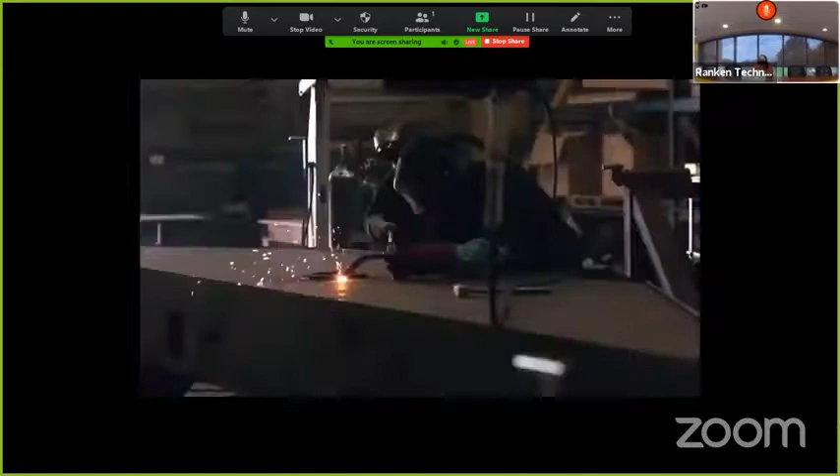We made that. We've made parts for satellites that are orbiting the Earth. I like to think that if I look up at the sky at just the right time on a clear night, I just might see it flash by. For millions of Americans, manufacturing is a great career, filled with opportunity, and it's closer than you think. Right now, probably just a few miles away, are good, solid jobs leading to lifelong career opportunities in manufacturing. Find out for yourself by attending a Manufacturing Day event in your community this October. You can visit facilities and meet real people just like you, who have made a good life for themselves. What is the future of manufacturing? You are.

Let's begin. Today we are going to break down the manufacturing industry into two areas: machining and plant operations. Let's start with machining. Machining means to use a machine to perform a task. Materials that are machined are usually metals, but other materials including plastics and graphite can also be machined.

Manufacturing means to produce something. Paper is a manufactured item. Plastic bags are a manufactured item. So are tissues, clothing, and many foods. The machining industry produces end products and components that are assembled as end products and supports manufacturing for the products used by people throughout the world every day.

Ranken has connections with several area companies that machine important parts for various industries. Let's begin by watching a few videos that they have sent in showing us several aspects of the machining industry.

We will start with a company called Hydromat. Hydromat is a St. Louis company that builds precision transfer machines. They literally make the machines that other machining companies use to make precision parts. They innovate and engineer metalworking solutions by building the appropriate machines for the job. They rely on skilled workers to design, manufacture, and set up their precision transfer machines.

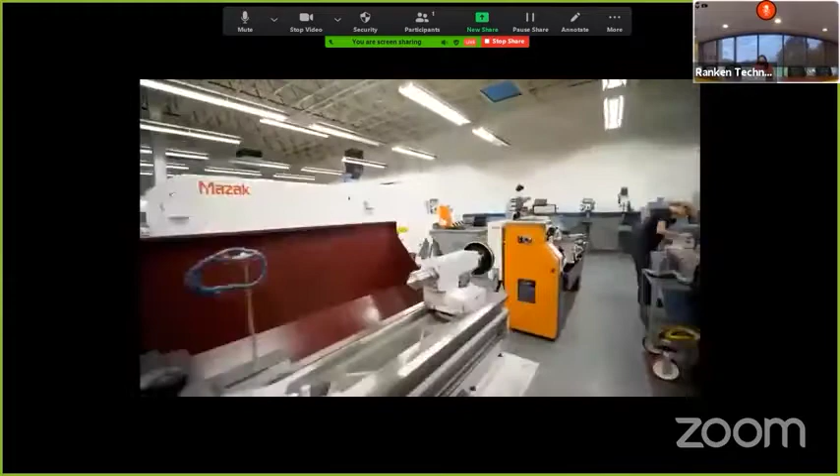Next, let us look at another company that machines parts in Wright City, Missouri. Tech Manufacturing is an aerospace machining and manufacturing company specializing in computer numerical control, known as CNC. That's precision machining of complex, thin-walled, monolithic, hard metal, and aluminum structural aerospace parts for commercial, military, and business aircrafts. CNC precision machining describes cutting, milling, turning, and electrical discharge machining using CNC equipment.

Tech Manufacturing has been a longtime supporter of Ranken by employing many of our interns from our Advanced Precision Machining program. In this video, you'll be introduced to lean manufacturing, a method companies use to constantly look for ways to reduce waste and maximize time and resources. Be ready to identify how Tech Manufacturing implements lean manufacturing, and notice their emphasis on quality. Identify the 3-letter machine used to precisely measure parts to ensure quality, as you'll need this for the scavenger hunt. Okay, let's take a look.

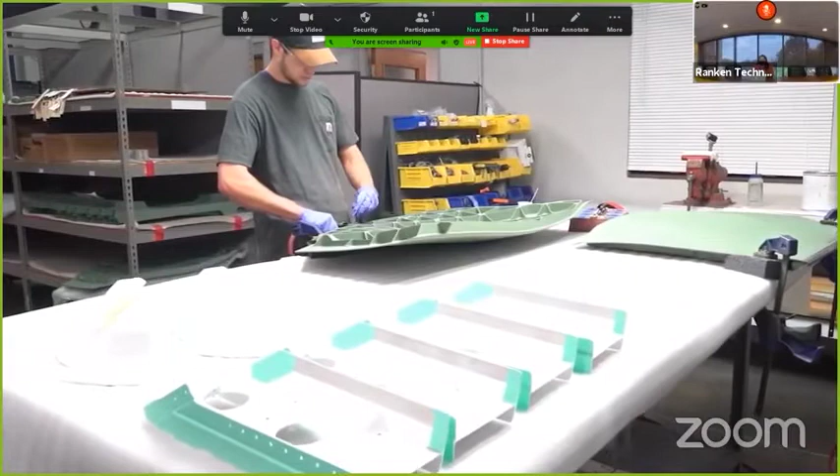Since 1956, Tech Manufacturing has been providing world-class machining and assembly to customers in the aerospace and defense markets. Tech Manufacturing specializes in precision machining of complex aerospace structures. These complete components are constructed of thin-walled, monolithic, hard metal, and aluminum, designed specifically for aerospace parts in capacities of commercial, military, and business airframes.

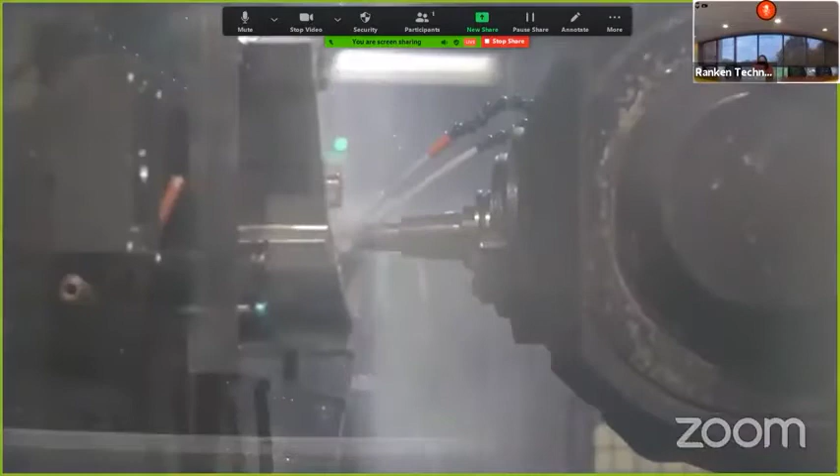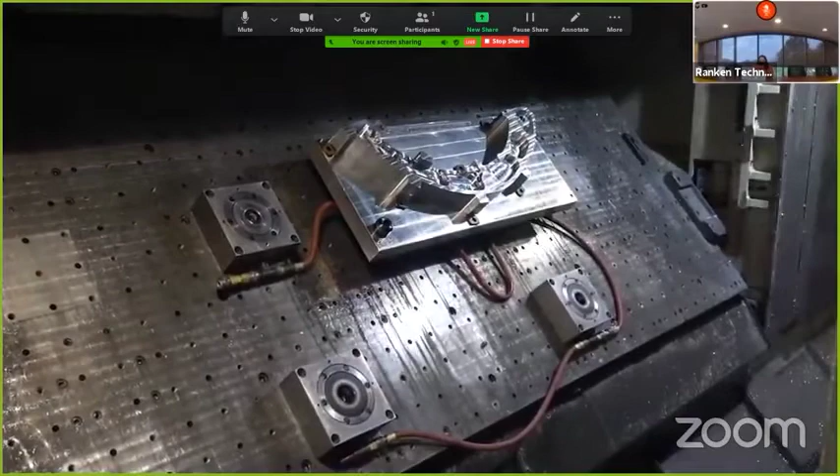Our team provides elegant manufacturing solutions with the highest level of machining skills. Precision, quality parts, and superb customer service are the foundation of why Tech Manufacturing has been a trusted supplier to large aerospace manufacturers for over 60 years.

In 2018, Tech Manufacturing joined the Domaille family of companies. The resulting combination delivers a broader solution to customers. Domaille family of companies is a worldwide provider of innovative solutions within the aerospace and defense high-tech industries, and a leading OEM of fiber optic polishing equipment.

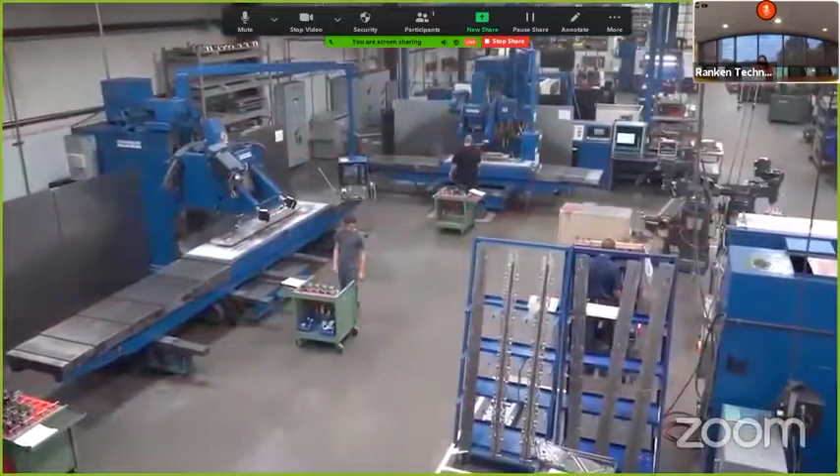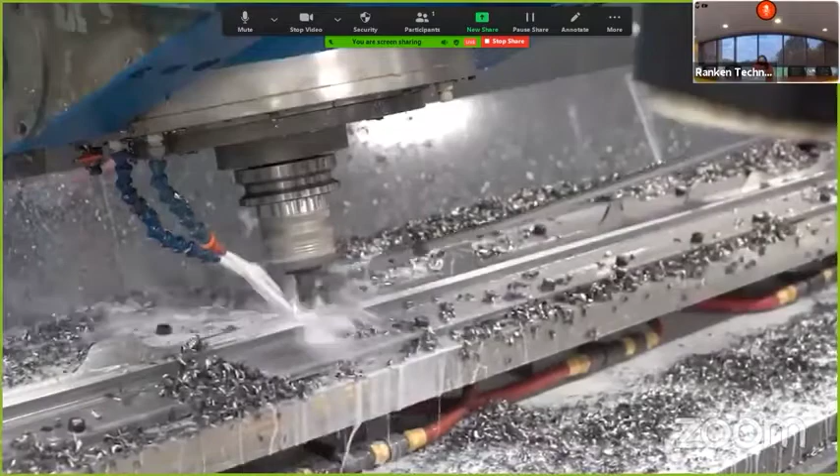Considered an expert in multi-axis machining, Tech Manufacturing offers 3, 4, and 5-axis machining of soft and hard metals. Our part size extends up to 166 inches. Typical materials manufactured from extrusion, casting, forging, and plate include aluminum, titanium, beryllium copper, stainless steel, AerMet 100, and Inconel.

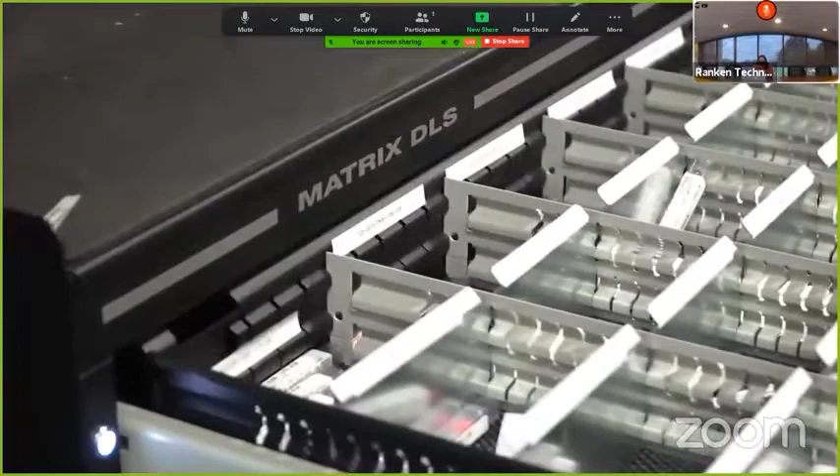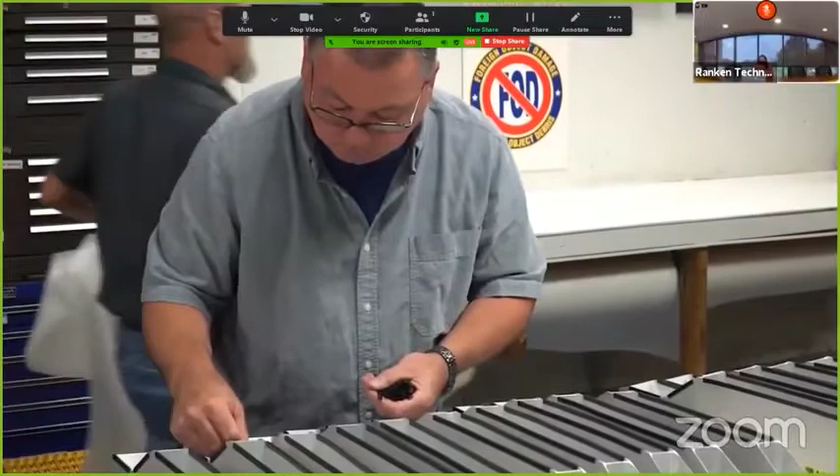We have fully implemented lean manufacturing processes to deliver the highest quality precision machined aerospace parts. Our lean manufacturing process starts with organizing parts into part families. The part families are assigned to machine cells designed to specifically handle each part family. Regular monitoring of specific metrics for each cell allows a clear focus on continuous improvement, as well as positively impacting predictability, throughput, and on-time deliveries.

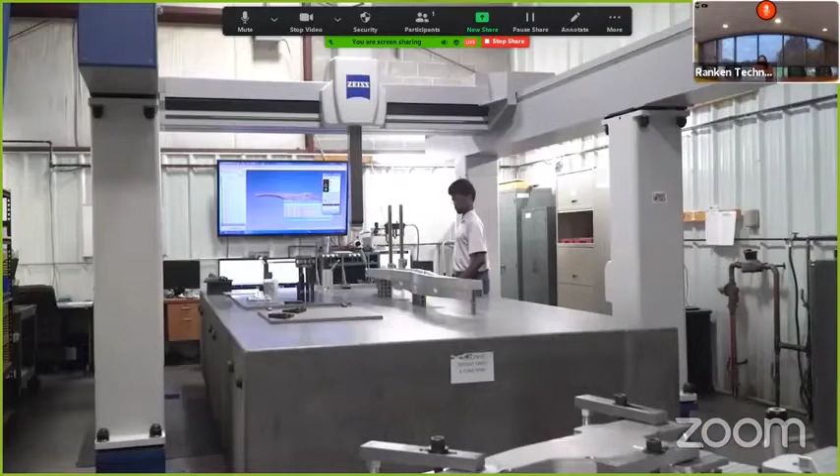Our team and equipment play an extremely important role in maintaining our proven record of quality and delivery performance. Tech Manufacturing utilizes a scanning tip probe Zeiss coordinate measuring machine, or CMM, operating on the latest Calypso computer-aided inspection software to support our quality control processes.

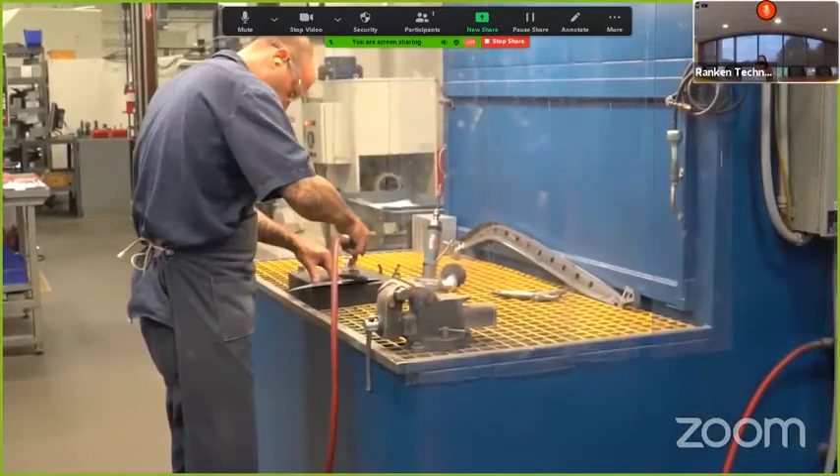Our impeccably skilled work has been recognized through several awards and certifications, which include certifications in both AS 9100 and ISO 9001, fracture critical and traceable part compliant, ITAR registered, and Digital Product Definition, or DPD, certified.

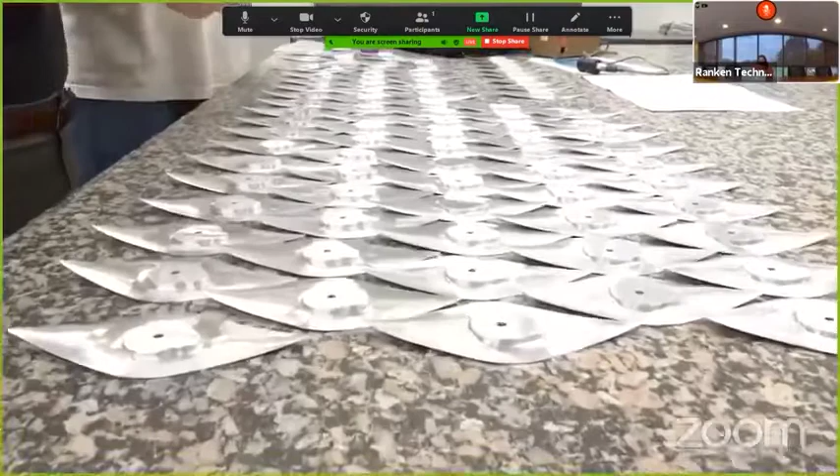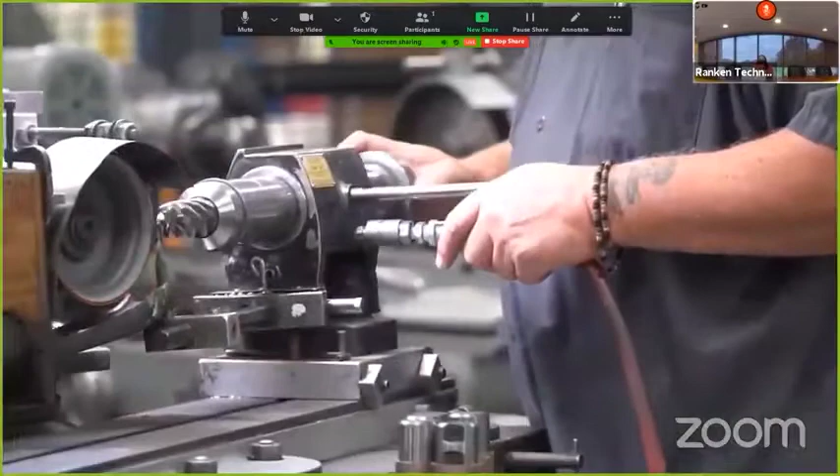Tech Manufacturing has full DPD capabilities approved by customers including Boeing, Lockheed Martin, Northrop Grumman, Gulfstream, and several Tier 1 contractors. Our engineering team is fluent with complex models and has several software packages that allow digital data to be securely received, translated, and validated through a robust AS 9102 First Article Inspection, or FAI, process.

Tech Manufacturing has a robust and thorough quality planning process that begins as soon as the customer's purchase order is received. Our sophisticated quality plan is developed using Discus FAI software and begins before any other engineering activities, which ensures requirements are met and understood throughout the entire planning process.

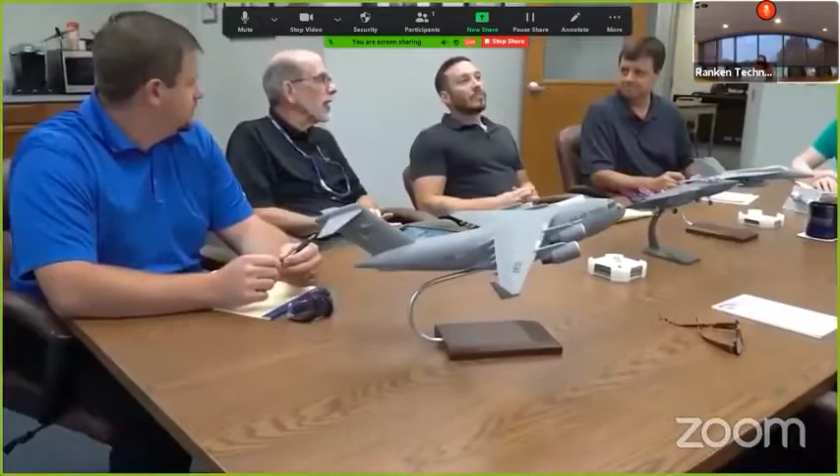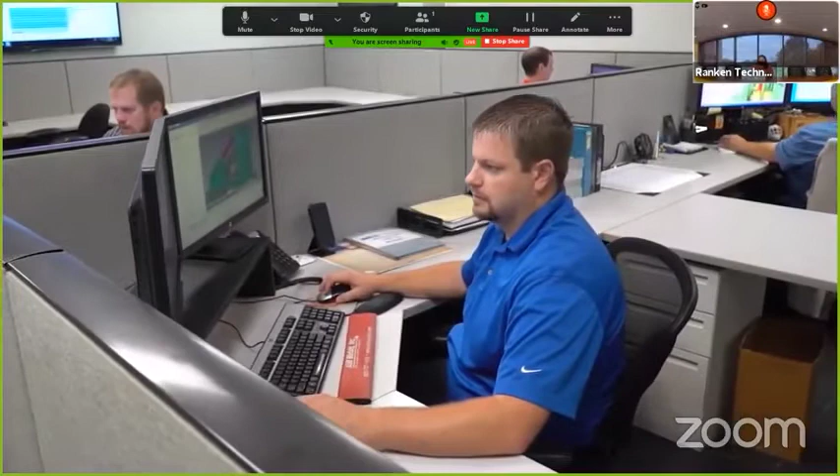Quality plans, including AS 9102 forms, go through a rigorous review process, ensuring all requirements are captured and flow correctly into production documents. Tech Manufacturing utilizes the most current CAD/CAM software to support manufacturing processes from prototyping to full production runs. We also support a variety of other drawing formats and specifications.

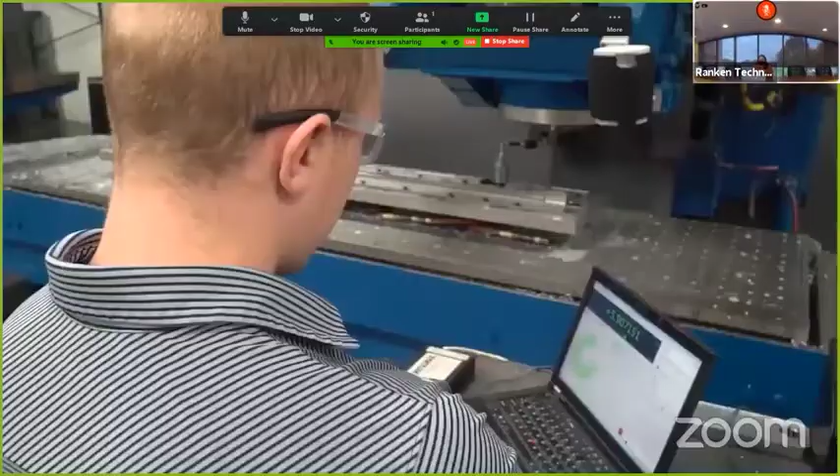Our ERP and supply chain management systems synchronize the manufacturing, addressing everything from encrypting and vaulting data to flowing contractual obligations. Throughout our supply chain, Tech focuses on adding value through building a strong team and by working in conjunction with local technical colleges. Our talented group recently earned the Top Shops Award from Modern Machine Shop.

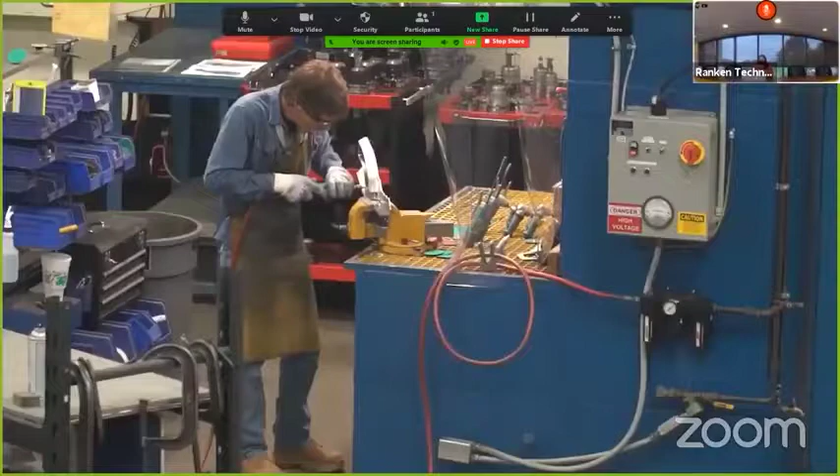Whether your organization needs help with manufacturing input, prototype machining, or a highly competent supplier for built-to-print applications, we encourage you to make Tech Manufacturing your key contract manufacturing partner. Please visit our website at techmanufacturing.com.

Wouldn't it be cool to say you made those precise parts that go on Air Force jets? That's something to be proud of. Notice they rely on skilled workers throughout their shop.

Tech Manufacturing noted how they use really cool software to make their job easier. Some of you have maybe played or watched kids play the game Minecraft. That is similar to the 3D modeling programs used in the manufacturing industry. In the Tech Manufacturing video, they used various CAD/CAM software to recreate 3D models of the parts.

Tool paths are generated from the 3D models to produce a language used by machines. The tool path is back plotted or simulated before using an expensive CNC machine and raw material to test the program. This is another way lean manufacturing is implemented in that industry.

In the next video, you'll be introduced to multi-axis machining and its many functionalities. Multitasking machines deliver maximum versatility and throughput. The machines combine the capabilities of a high-powered turning center and a full-function machining center to produce parts in single setups. Recall Tech Manufacturing and Hydromat utilizing multi-axis machines to be competitive in their industry. Multitasking is the technology of the future.

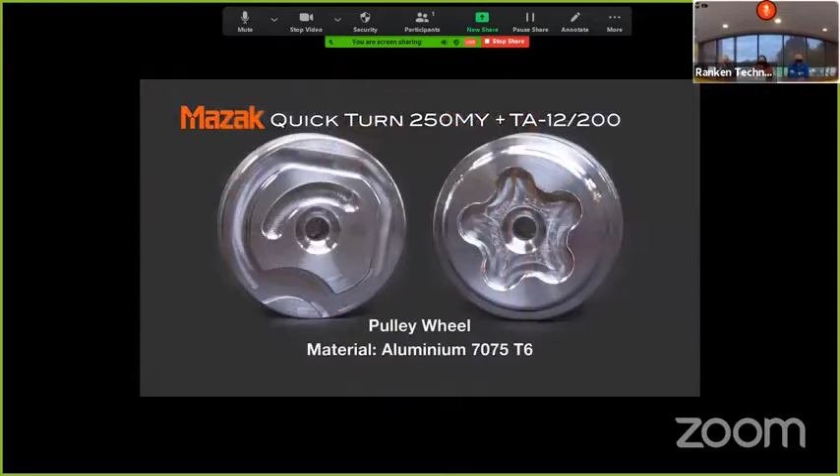Let's talk about how Ranken can help you become a machinist. The need for qualified machinists is rapidly increasing. According to the U.S. Bureau of Labor Statistics, this field is projected to grow by 10% from 2014 to 2024, faster than the national average.

Ranken's Advanced Precision Machining program was designed to meet those needs by supplying employers with skilled employees to offset the skills gap. According to research, the best way to learn your trade is to do it.

The hands-on experience received by our students is unparalleled. Projects are designed to simulate real-life situations, offering problem-solving opportunities not easily matched in the classroom setting. Our curriculum was developed in cooperation with industry partners to ensure courses and student-level outcomes are aligned with industry needs. It is proven that student growth and confidence are maximized when given opportunities to access and work in the

state-of-the-art CNC and conventional learning environment on a wide range of group and individual projects.

The courses offered are as follows: Machining Foundations, Applied Machining Foundations, G-Code Programming, Advanced Precision Machining, Mazatrol Programming, Mastercam Programming, and Multi-Axis Programming. Additionally, all students are required to participate in an 8-week-long internship.

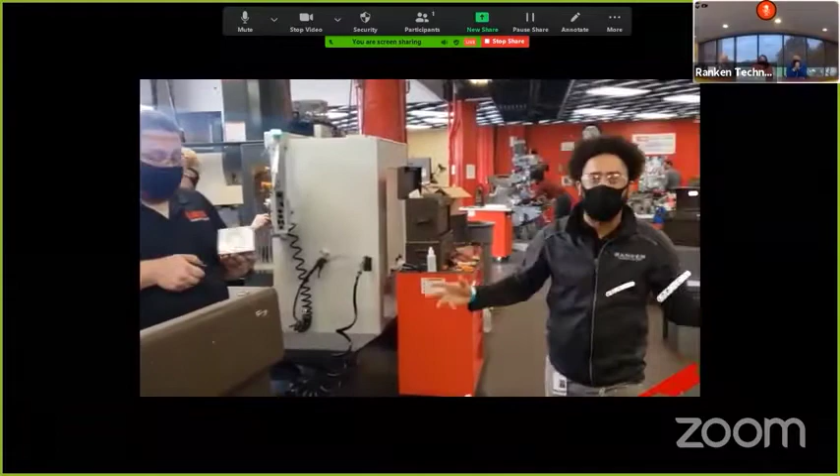Let's check out Patrick. He's one of my students that wrote a program all by hand. Most of them do here. He's about to run that right now and show you guys how to make some chips and how to make something out of nothing. All right, check this out. Patrick, you ready?

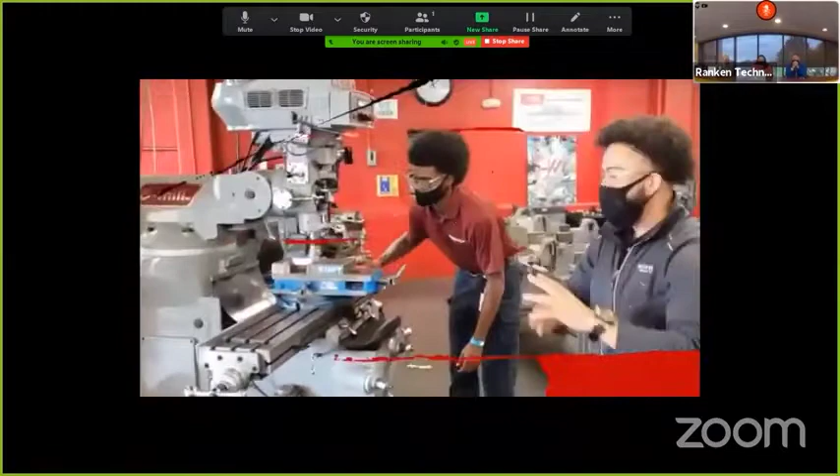Programming and tool tapping—sometimes you have to do stuff by hand. Come check out Marquez's project that he's doing. This is manual machining. He's doing it all by hand.

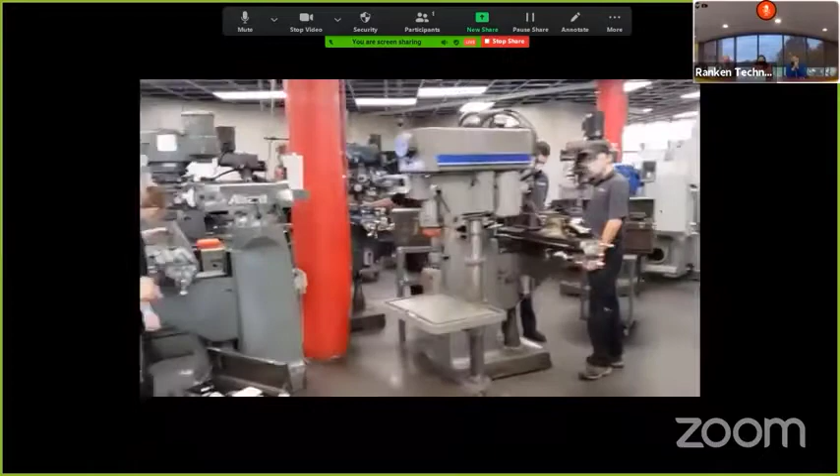You get to see some of our intro students. They're also working on Bridgeport mills today. They're setting them up, they're dialing them in.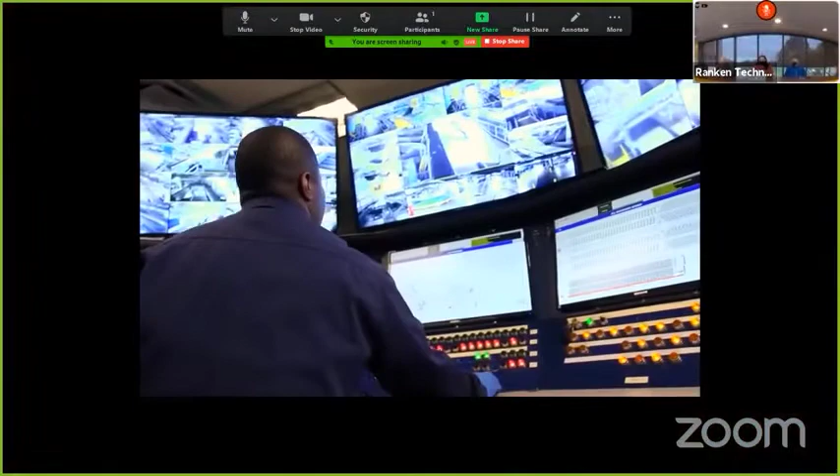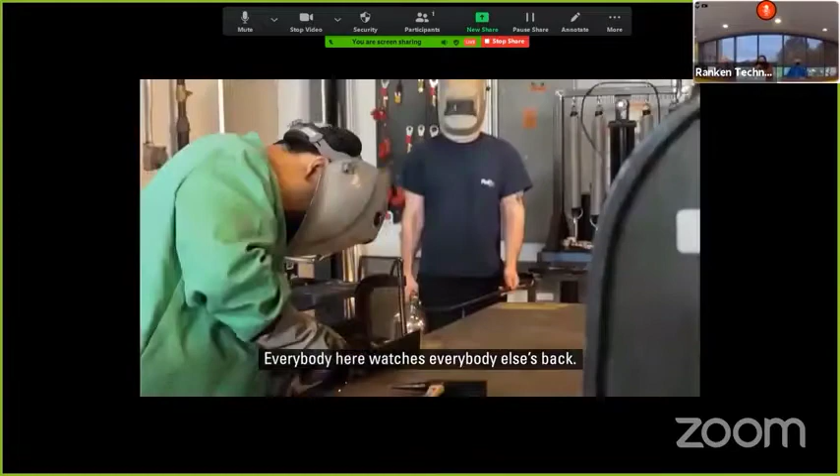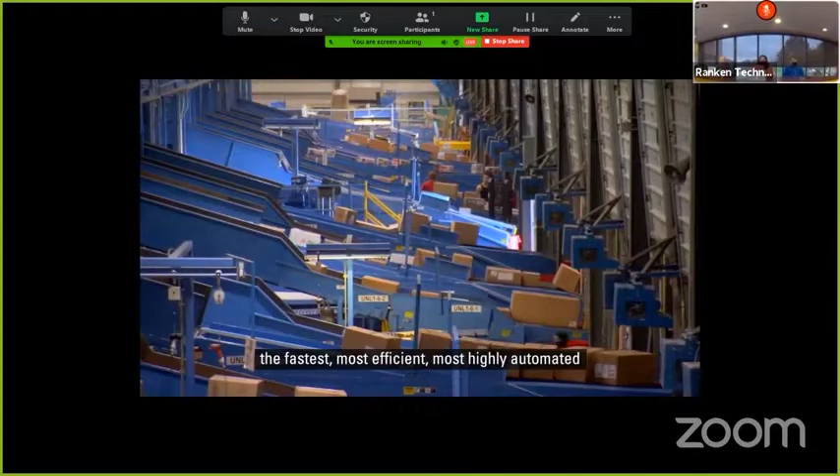When I came here, I saw the maintenance team and I was like, wow, that's a job I want. This is not a one-man operation. We hold ourselves accountable. Safety is everything. If it's not safe, we're not going to do it. Everybody here watches everybody else's back. That's why we work so well together. FedEx Ground Maintenance Team. Every day, we bring our best. It's just that simple. We repair, maintain, and engineer the fastest small package sortation network automation. It puts us ahead of the competition. Maintenance, it keeps us there. If the conveyor is not working, we need to be on point, ready to go to fix it and have it up and running. Everybody tries new ideas. There's plenty of people here that know a little bit more and are willing to help you learn more and advance into your career. It's that huge experience level that we can draw from that really makes us who we are and as successful as we are. The right place, the right price, backed by the right team. The maintenance department here at FedEx is very important. It's vital to the day-to-day operations. If the building's not operational, nobody's going to get their package. Everything can be improved on, from the time the package comes out of the trailer until it's loaded to the next. If you have an idea, you can talk to your manager or boss or supervisor, whoever's available, and they'll support you. It's got its own framework. At the end of the day, we all get around and share our ideas, put our ideas together and come up with the best solution. The equation is simple: the value of time, the advantage of speed, the satisfaction of our customers. This is why we dominate the ground pickup and delivery experience. FedEx. It's what we stand behind. Together, we are FedEx Ground Maintenance Team. Together, we are FedEx Ground. Every day I bring my best. At FedEx Ground, every day we bring our best.

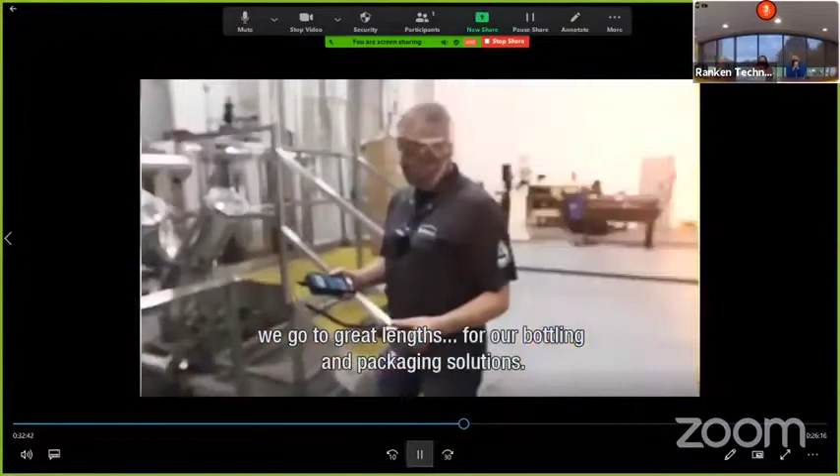We deliver innovative, tailor-made solutions that meet the individual needs of retailers and A-brand customers. Even though the drinks we produce do not carry our name, we go to great lengths for our bottling and packaging solutions.

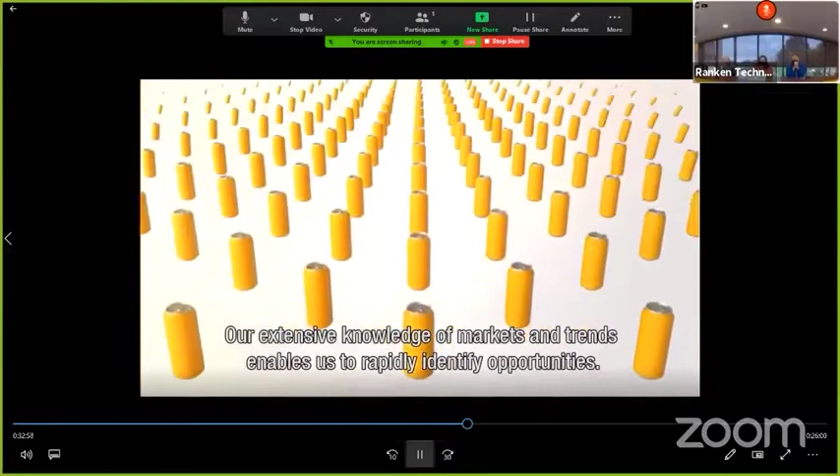We take responsibility for the quality we deliver, because our customers' success is our success. We continuously invest in production capabilities, equipment, and our staff. Our extensive knowledge of markets and trends enables us to rapidly identify opportunities. Being agile and reliable, we work closely with our customers, constantly developing and producing new concepts.

What we do has a direct impact on the environment through our sourcing and production process. In doing so, we touch the lives of our own people, as well as those in our supply chain and surrounding communities. A big responsibility, but also a big opportunity.

Co-founder of the Sustainable Juice Covenant, we set an ambitious goal for 2030: all fruit for juices sourced by Refresco should be grown sustainably. One clear example of how we innovate responsibly. Refresco, expert in beverage solutions.

Let's hear about another company called Nestle Purina. Not only is their corporate headquarters located here in St. Louis, but so is their support center manufacturing facility. This facility machines the parts for their other manufacturing facilities, ensuring quality and timely delivery of parts.

Today, they have a modern machine shop along with sheet metal and welding fabrication shop that supports all of their North American factories. They also provide prototype development and testing, innovative design services and support, inventory space for spare parts, electrical and automation, mixer inspections and rebuilds, and capital purchasing services. This truly houses the team of people that is part of their relentless pursuit and pledge to continue innovating.

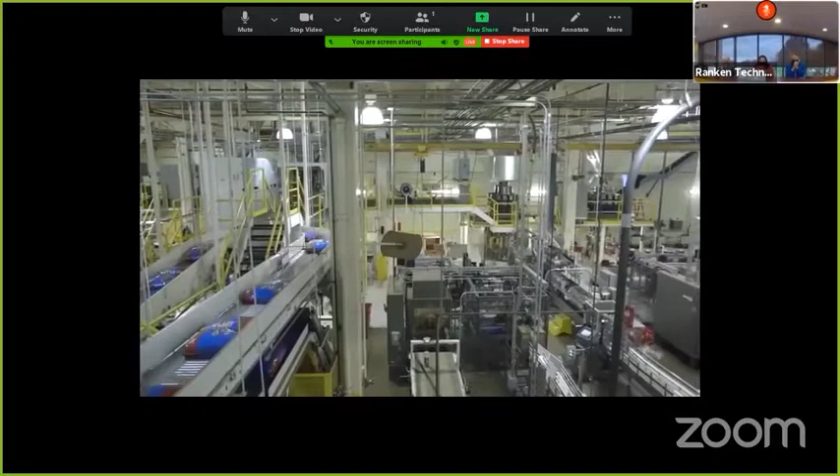You know us as Purina, and I wanted to take an opportunity to explain to you why we are so inspired on coming to work every day. If you look at everything we do, all the way from the floor perspective, even to what I do on a day-to-day basis, we are inspired to make sure that we have the highest quality products, not only to keep your pets happy, but also to keep ours as well.

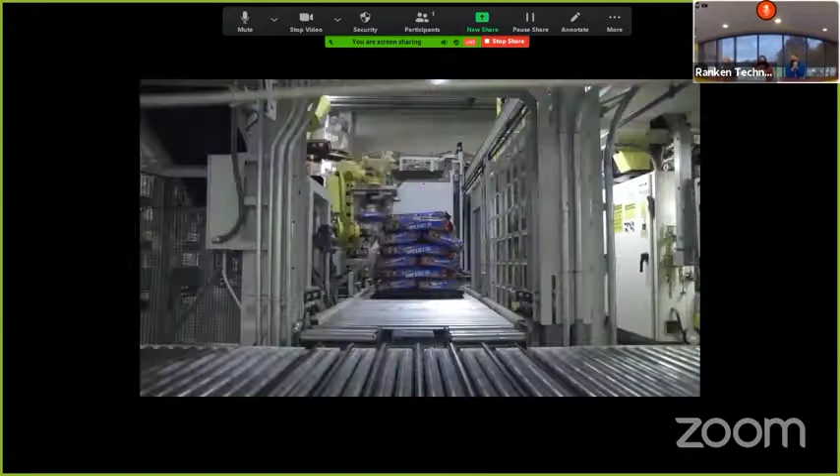Manufacturing over the past several years has really evolved. If you look at where it was about 10, 15, 20 years ago, it was very manual labor, a lot of interaction from an employee standpoint on the tasks they performed on the floor. As time has come along, technology has actually been integrated back into the process, and we have found ways to improve the performance of the equipment and the way that the employee performs their job.

So manufacturing has a lot of components to it. Everything from receiving raw ingredients in to the point where we store it and we mix it and we put it in extrusion. But that's not just manufacturing. It's everything all the way back to the marketing end, where we're actually looking at product development and making sure that we've got the right stuff out on the market, to even the consumer side, where we're making sure that we have a good relationship with our customers and our consumers.

The other part of it is, if you look at it, yeah, we manufacture here, but we have a global impact on what we're doing on a day-to-day basis. We actually at this facility ship to New Zealand, to Mexico, to Hawaii. So it's not just the United States, but Purina as a whole is shipping to all countries as well.

So would I've told you like 12 years ago career path was going to be manufacturing? Probably not. But you know what? I'm here and I absolutely love my job. I love what I get to come in and all the individuals that I get to work with on a day-to-day basis. What I want to do is I want to take an opportunity to challenge you: I dare you to consider a career in manufacturing.

Notice how being a part of a manufacturing company involves so much innovation. As they look to produce quality products, Nestle Purina is always looking for ways to improve the process. Their employees are skilled workers that are using the technology to do the hard manual labor. It is those skilled technicians that program the new machines and provide the maintenance that allows them to have a non-stop operation. Wouldn't it be amazing to be a part of a team that can make that all happen?

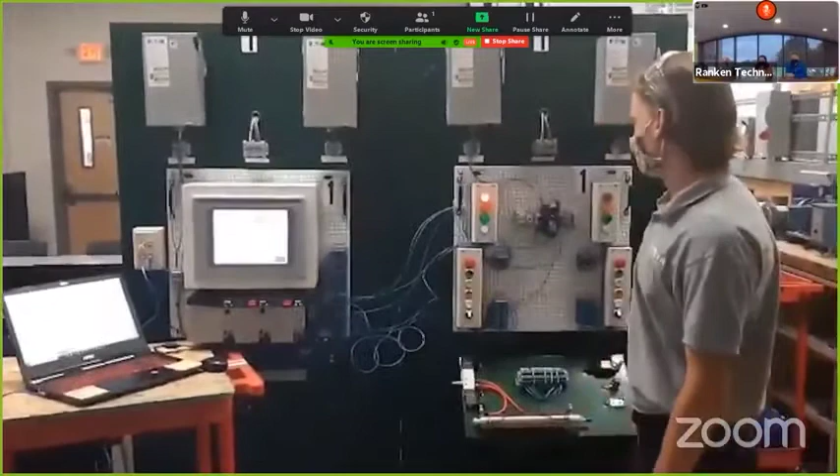Hello, my name is Kyle Weldy, and I am a student at Ranken Technical College in Wentzville, Missouri. I'm taking the Electrical Automation Technology course, currently in my 3rd semester. Today I'm going to show you what we've been learning the past couple weeks, so I'll put my safety glasses on and get to it.

This over here is our hard wire, and these are our outputs, and these are our inputs. These wires run over here and connect to our PLC, which is a programmable logic controller. This big thing above it is our HMI, which stands for Human Machine Interface. Both are connected to our computer, and this is where we program for our PLC, which runs these wires. I'll give you an example of what our program does.

When the green button is depressed, the amber and green lights come on, and in our program I have a timer for 10 seconds. When that timer ends, this will jump down here, as you just saw. At any time during this run if there's a problem, I hit the E-stop, and that returns the program to its original light and resets it.

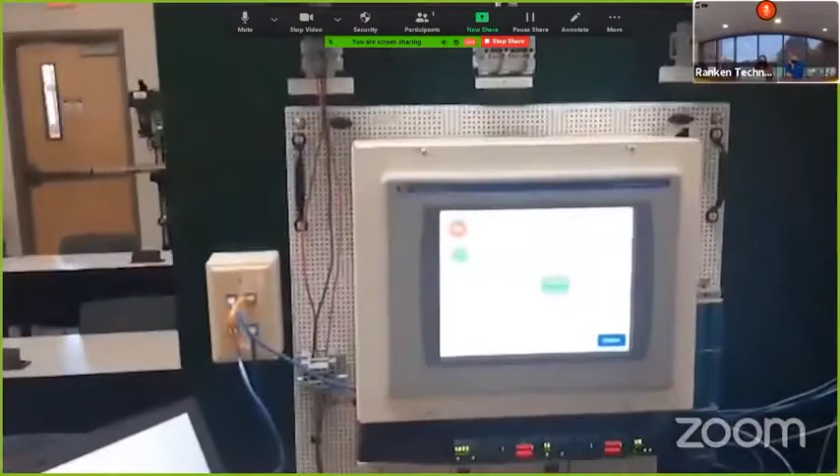We can also run these inputs over here. I simply press start, as we did before, and the program will run as it did previously.

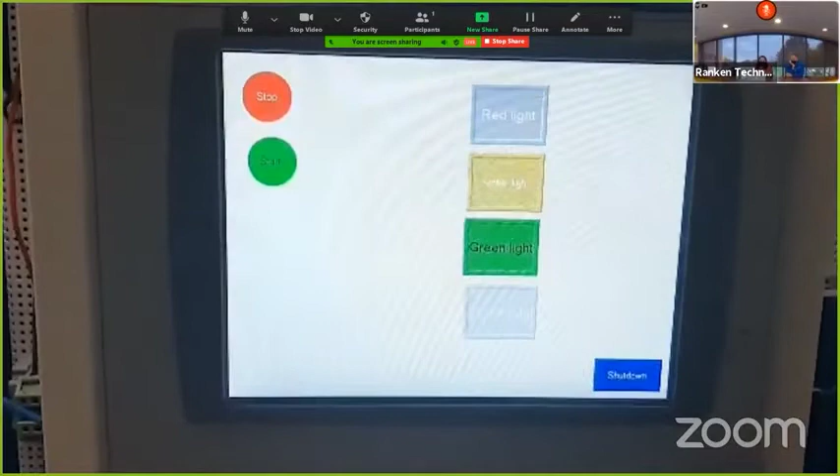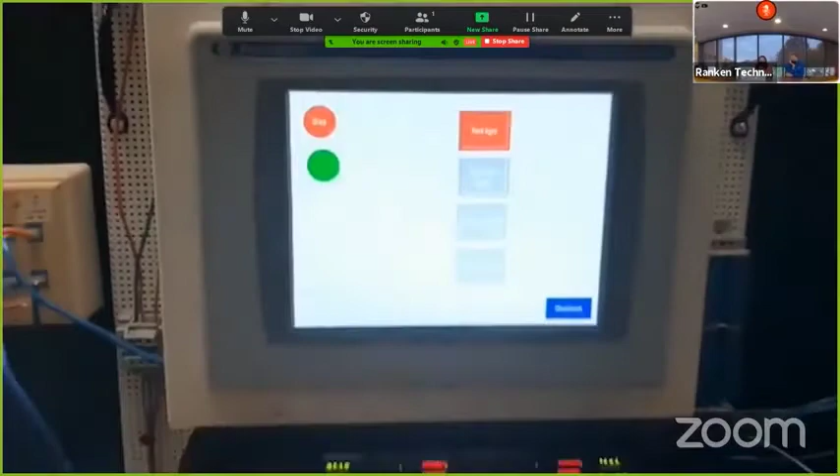The E-stop will also work from our hard wire, as seen there. This is just a really basic program that we've been learning. Through the weeks, they'll get harder and harder, but this is what we've been learning so far.

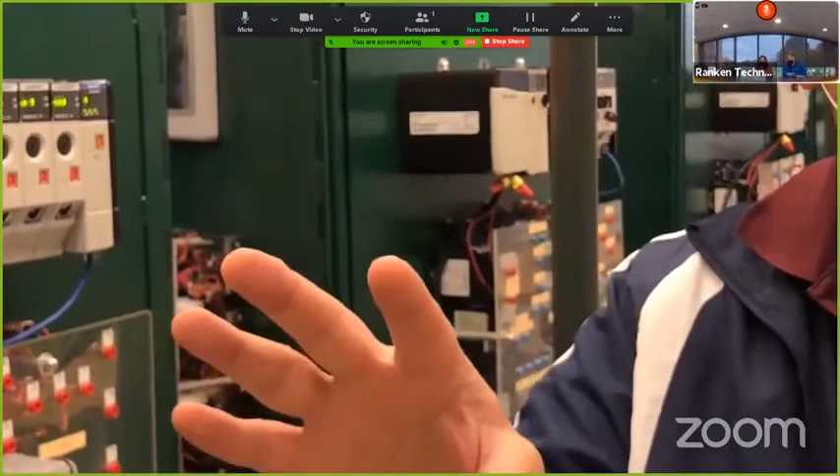In this lab, the students interact with all the equipment. They learn to communicate with the PLC so they can wire it up and control objects and different control relays, motor starters. They can control all that from in here by pushing buttons, or they can go into the other main control room and control that same equipment from there.

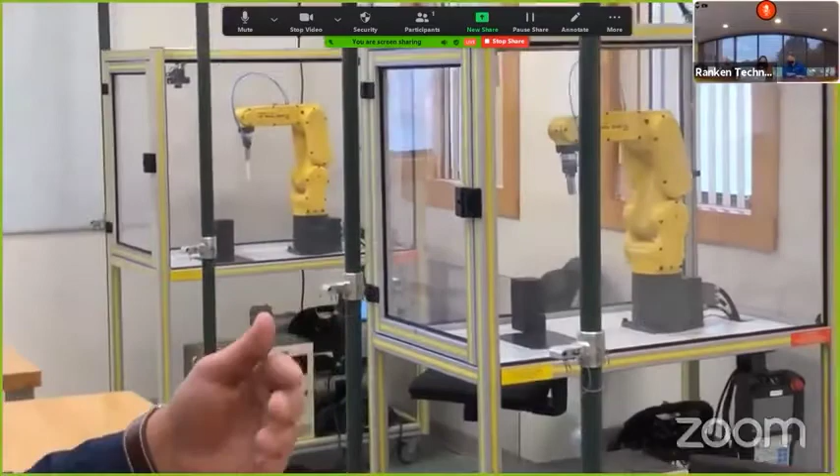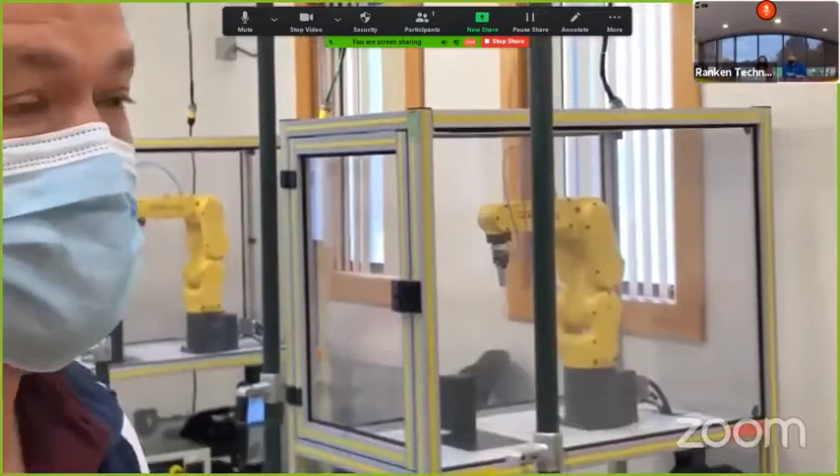And then of course our robots, our toys - the students learn to program these to do different actions: make a circle, pick and place an object, put it in the block, and they have all sorts of fun with that. They build log cabins. It's pretty cool.

What are the robots used for in reality? Out in the real world, robots are used all over in the manufacturing world to pick and place parts, to assemble electronics, to weld. Getting to see one of these robots weld is incredible.

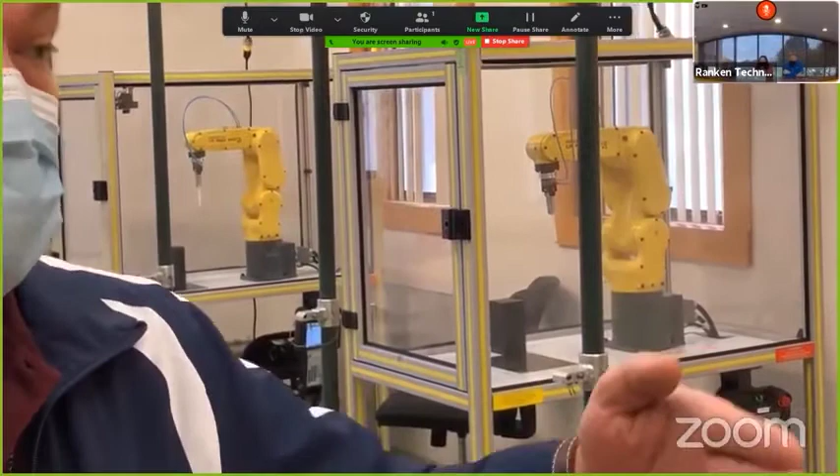Ranken's Control Systems Technology program focuses on the precision of production. When you open a bottle of water or soda, we would like it to be safe to drink. Instrumentation within the production process is essential to control temperature, level, flow, and many other elements that affect production.

Control Systems Technology graduates have the understanding and ability to control those elements. Just as electrical motors must keep everything running, the instrumentation must be accurate to produce a quality product. Let us watch a clip or two on demonstrations from the Control Systems Technology Shop, or CST.

All right, this is CST, Control Systems Technology. It's instrumentation and process control. So the first half of the course, we work on instruments. Like here, we have 3 different flow meters.

We're using one of them now to measure flow from here to there. We have level indicators here, ultrasonic, and temperature, pressure. We learn about all of those process measurements.

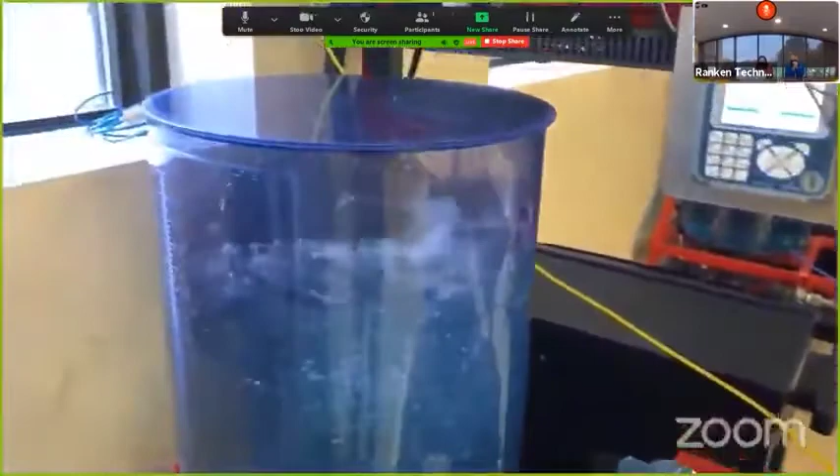Then the second half of the course is process control, where we get into some of the controllers and start controlling these instruments, using them to do real-world actual measurements. Right now they're doing a flow test where they're finding out that the pump speed, how fast they pump, is directly linearly proportional to the flow rate.

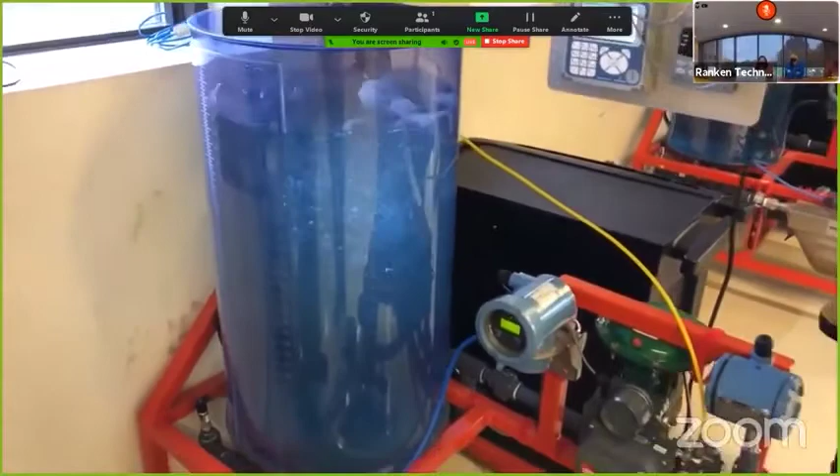How would you use this in the real world? This process equipment is used all over the place. We measure flow for a million different things. When you're adding one part of a process to another, you want to know what the flow rates are. Plants like Anheuser-Busch InBev use all kinds of this equipment. Granite City Steel, just about every industrial plant around uses some of these instruments. Most of the time, once you know these instruments, you're in for a raise.

Next, let's talk about our one-year fabrication and welding technology program. Here at Ranken, we have a modern-day welding shop containing state-of-the-art equipment. Welding is done on plate and pipe in low-carbon steel, stainless steel, and aluminum.

Students begin the program by learning the different cutting processes in both theory and shop. They will also be trained on various welding processes such as shielded metal arc welding, flux core arc welding, gas metal arc welding, and gas tungsten arc welding. During each process, students will perform fillet welds and groove welds in all positions. Students will also weld carbon steel pipe in all positions, working towards getting American Welding Society welding certifications in multiple positions and processes, which is key in the industry for employment.

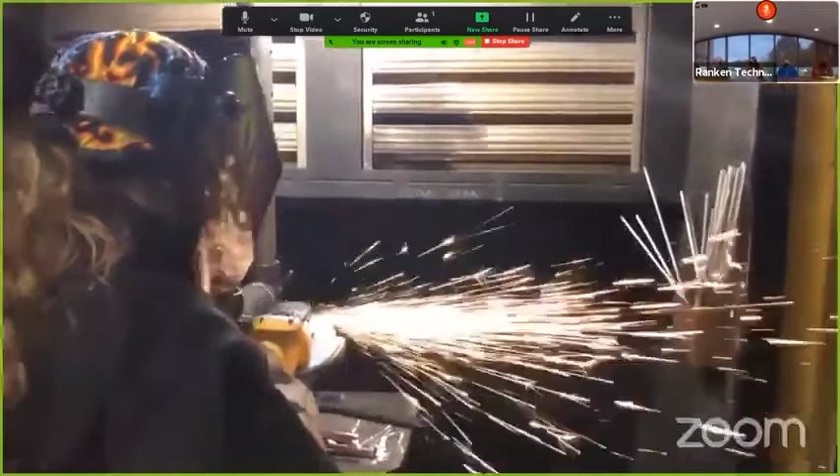Right now we're working on groove welds, so a lot of them are just working on the torches in the back and prepping their plates, like he is over here, getting them ready to go.

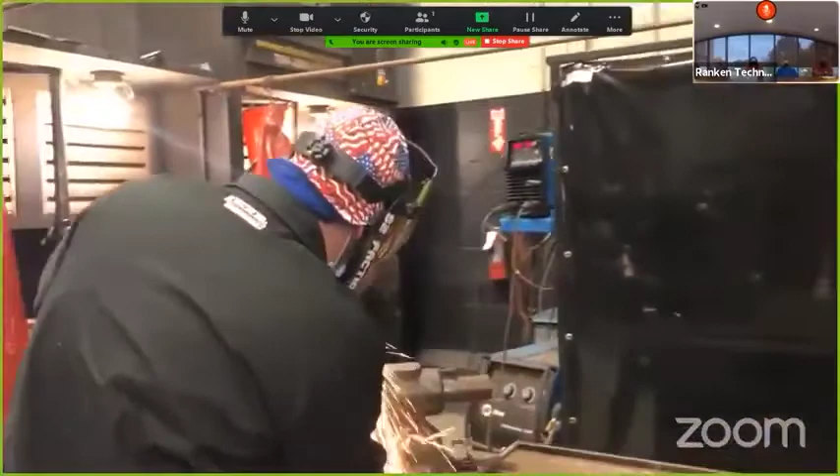Now let's take another look at a degree program that prepares students to support plant operations. The Industrial Technology program offers comprehensive training in several of the most sought-after skills that companies demand as they seek employees with multi-craft expertise. Program graduates have expertise in a number of fields and are capable of stepping in and keeping equipment and machinery running in manufacturing plants, hotels, or other mid-size or large companies. Recognized for their breadth of experience, they are qualified to solve most technical and industrial problems experienced by companies today.

Additionally, our program prepares students for the Environmental Protection Agency licensing exam covering refrigeration and air conditioning repair. The Industrial Technology program is a 4-semester associate degree program. The program includes courses in the following: basic electricity, heating, ventilation, air conditioning, and refrigeration, introduction to welding, National Electrical Code, motor controls and programmable logic controllers, basic pipe fitting and plumbing, carpentry maintenance, hydraulics principles and theory, and industrial mechanical systems.

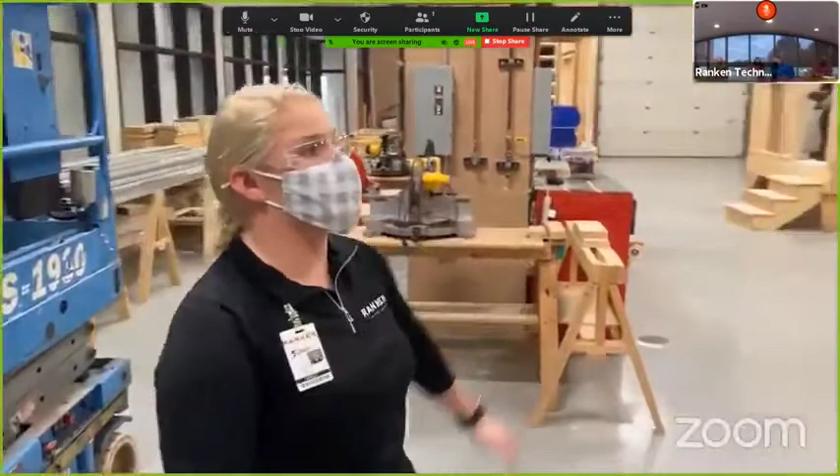Let's take a look at the Industrial Technology Shop. Hello, my name is Leah Sumi. I am an instructor here at Ranken Technical College in the Industrial Technology Department. I teach facilities, which, as you can see here, this is the facility semester in Industrial Technology.

In this semester, we will pretty much build a house from the bottom up. We will start with the frame, raise 2 wood walls, 2 metal walls, then hang drywall, eventually put in a drop ceiling. Then we will start to plumb. We'll put in a sink and a toilet. After we get through plumbing, we will also hit on HVAC. We'll learn the basic theory and eventually hook up a residential air conditioning and heating system. So in this semester, we learn everything from the basics and work our way into the more advanced programs.

The other 2 semesters that we provide here in the Industrial Technology Department are the mechanical and hydraulic semesters. In hydraulics, we learn everything from the basics of fluid pressure, fluid movement, all the different types of controls and sequencing valves. We get to learn how to make cylinders move, retract at certain PSIs, how to create different types of systems, all the way into taking apart pumps, taking apart motors, and making your own system as well.

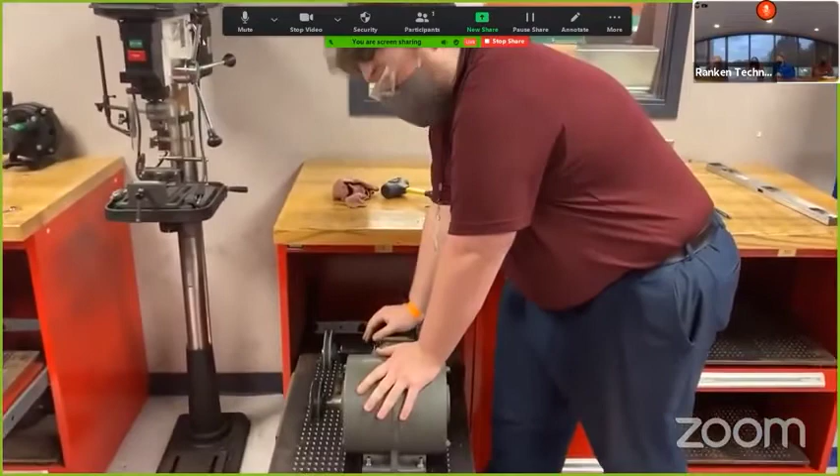In mechanical, as you can see right now, they're working at individual stations. Egan, can you explain a little bit what you're doing right now? Yeah, absolutely. Currently, we're working on a V-belt alignment. It's a little tricky, trying to get it as precise as we possibly can within about 1 to 2 thousandths of an inch. Awesome.

And also in mechanical, so this is a little bit into the semester right now. In the beginning, we work on filing. We do everything from a drill point gauge, assembly plate. We take apart gearboxes. We take apart motors, pumps. We do a lot of drilling on the drill presses, as well as getting into rigging, and yeah, that's it.

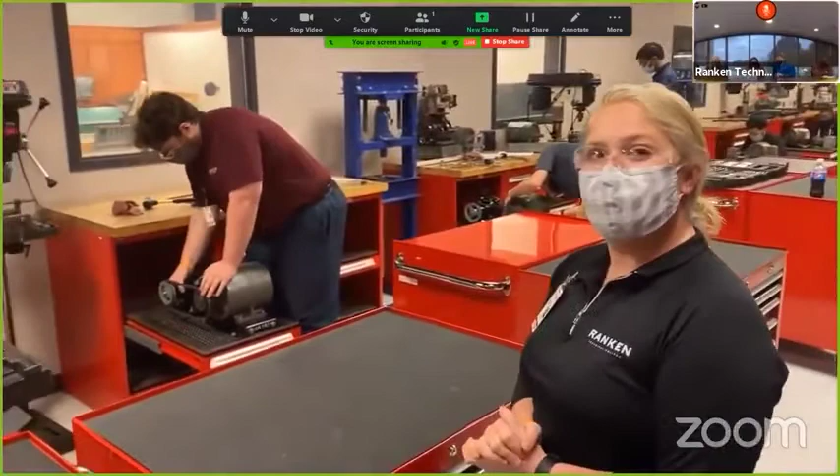In the 4th and final semester of INT, this is the electrical department. In the very beginning, we'll learn everything from the electrical theory, safety, practicality of electrical, then get into the NEC code wiring. They wire transformers, motor controls, motor drives, and PLCs. So let's go ahead and walk in and see what they're doing.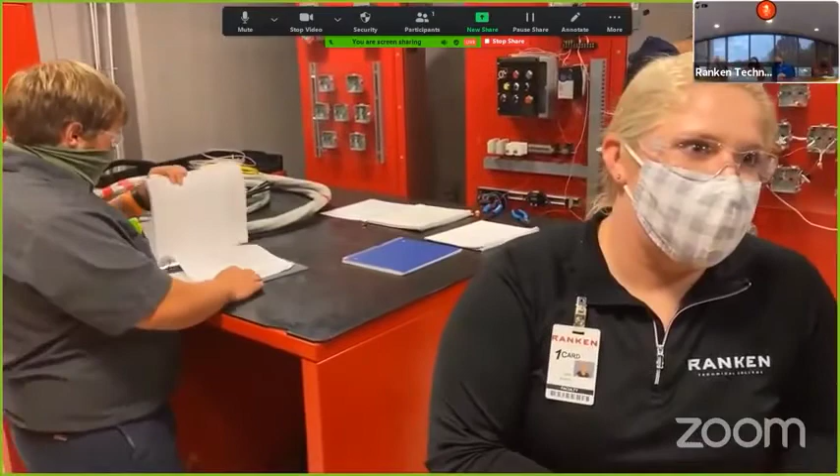And then, I don't know if you want to... You can ask people questions. Okay. All right. So we already talked to Zach. He's, yeah, you can talk to him again. Come on. Are you ready?

Real loud. All right. So, Aaron, can you explain to me what you're doing? So right now, I'm connecting the home run to the switch to allow the luminaire to light up. Perfect. Awesome.

And you can just take whatever training. It was a high school you had to audition to. I didn't know that.

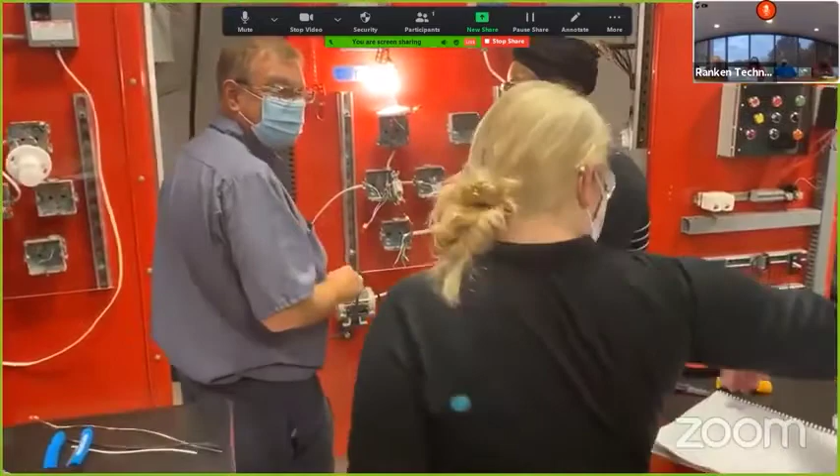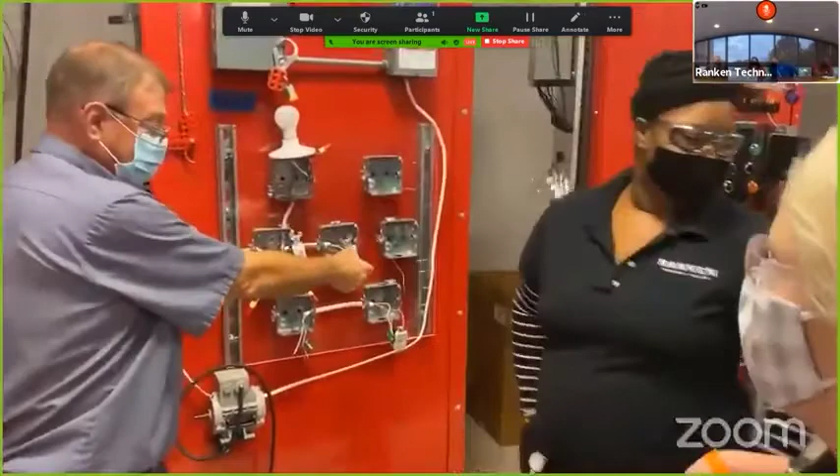Explain what we're wiring today? I'll let Ms. Spencer explain this and how the three-ways work. So I installed a three-way switch, a three-way switching circuit. Both switches control the light. It's to simulate, say you have two entrances. So this would be one entrance, and say you went to the other entrance, you'd be able to control the switch from that location as well.

So now is the time we will take a look at some of the questions that you submitted through our online chat system. Today gave some insight into manufacturing and some of the great career opportunities available, whether you're a current high school student or you have already graduated and possibly thinking about career options and what path to take.

Hi guys, all right, so here's the live question and answer session part of this. On my right, I've got faculty member Leah Suni, and on my left, Department Chair JC Owens and faculty member Andy Rains. JC is part of the Advanced Precision Machining Department, Andy is part of the Electrical Division, and Leah is part of the Industrial Technology Division.

We have a few questions that came in while we were doing the live session. Our first question is for Leah: Is there any qualification needed to join the welding program, and will there be other types of training besides MIG welding that I already received in high school? There's no certification needed to start welding. If you come in with just the basics, never welded before, we welcome that. We want to teach you the basics all the way through, and we do other things besides MIG - we do stick and TIG and oxy-fuel cutting, so you'll be proficient in those processes as well.